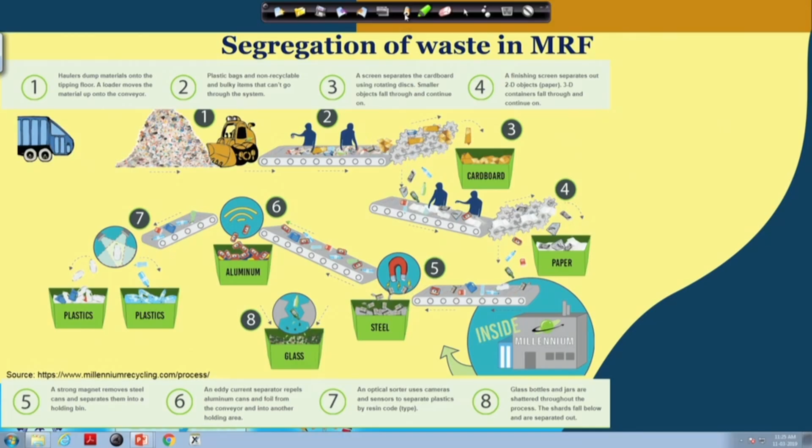So when we talk about plastic waste, for the most part the plastic that we have to deal with is coming from the municipal solid waste. It's the municipal solid waste material recycling facility, which is also sometimes called MRF, which stands for material recycling facility. So there waste comes in and it gets separated into different fractions. So there are different steps here.

The haulers will dump the material onto the tipping floor. Then plastic bags and other non-recyclable bulky items can't go through that system. So the screen will separate the different material. Then the screen will take the cardboard using rotating discs. Smaller objects will pass through. So cardboard will get collected and taken away.

Then you have a finishing screen that separates out 2D paper from 3D containers. So you have a screen here which removes the paper. Then you also have another step which removes the metal, so you may use a magnet to remove the ferrous, and eddy current separators to remove the aluminum. Now after doing all that, what you are left with is essentially different types of plastic.

There are different technologies out there for managing these plastics. There are sensors, and you can have density separation which will separate heavy plastic versus light plastic. You can also have color separation, where based on the color of the plastic it will try to separate it out. The more separation you can do, the better the quality of the material, and you can sell that material at a better price. So as I said, the strong magnet will remove steel, eddy current will remove aluminum cans.

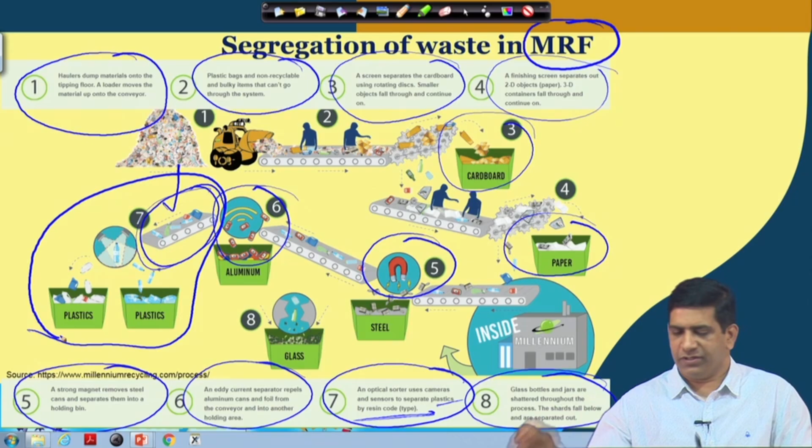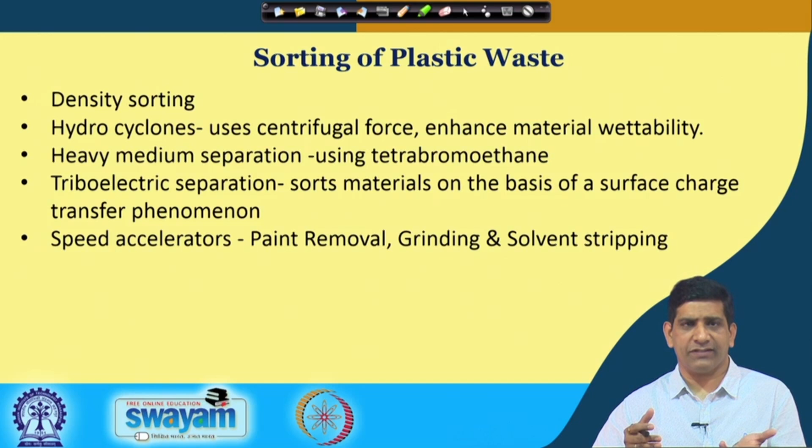So, sorting of plastic waste, you can do density sorting as we just talked about. You can have hydrocyclones where you use centrifugal force and enhance material wettability. Heavy medium separation, you can use tetrabromoethane to do the separation. Triboelectric separation sorts material based on a surface charge transfer phenomenon. You can have speed accelerators, paint removal, grinding and solvent stripping. You can also use the optical sensors we just talked about. So, other than the optical sensors, these are the other methods used for sorting plastic.

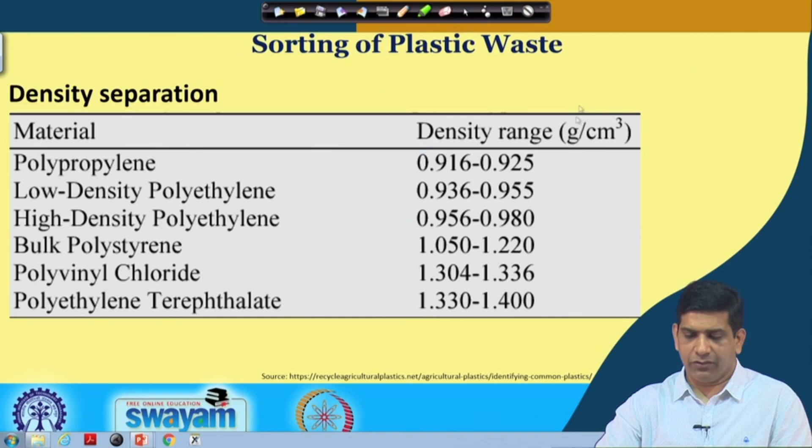So you will have issues getting these different types of plastic separated, but it does help in terms of at least doing the first round of separation, where you can have polypropylene separated out, with maybe a little bit of LDPE showing there. Then you have HDPE and bulk polystyrene, polyvinyl chloride, and polyethylene terephthalate. You may see some overlap as well, but at least it helps you sort it into 3-4 different fractions, and then you can go further and do other sorts of sorting to make it purer material.

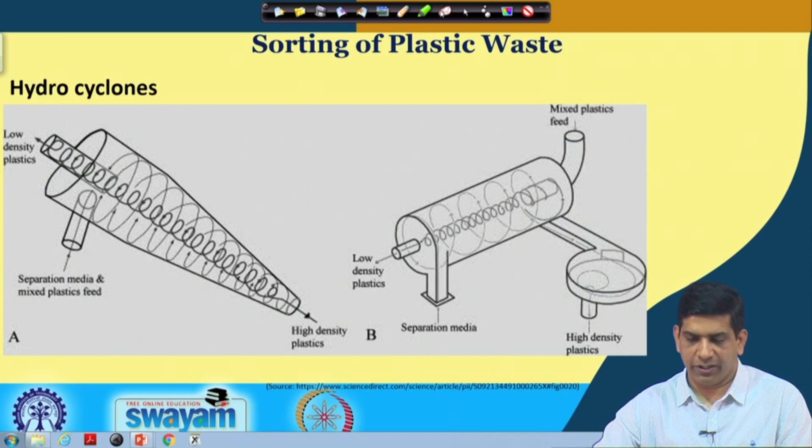Hydrocyclone: you use the hydrocyclone with a separation media and mixed plastic feed. You feed the stuff from here, this is the feeding area. You have a hydrocyclone where low density plastic comes out on this side and high density plastic comes out at the bottom. So mixed plastic feed enters from the top, low density material comes out from this side, and high density comes out from the other side. This is how you use hydrocyclones to separate low density from high density plastic waste.

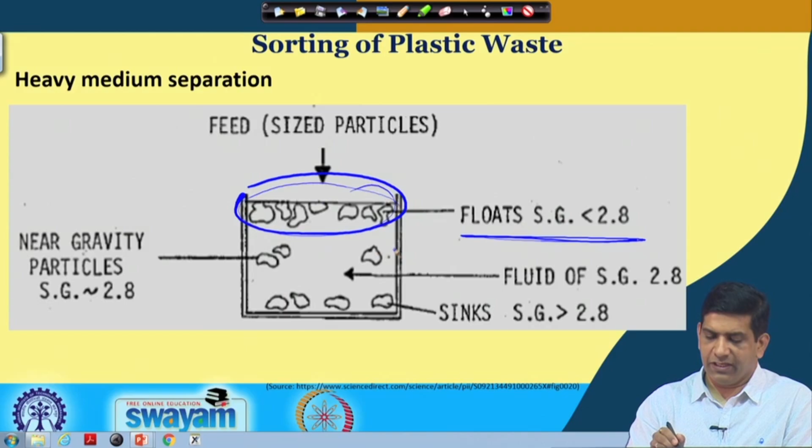Gravity separation as well, like heavy medium separation: you have different sized feed particles, you put them in, and some particles will float on top. So you'll have things floating on top, and in the medium fluid anything less than specific gravity of 2.8 you find on the surface, anything around 2.8 you find in the middle, and anything greater than 2.8 shows up at the bottom.

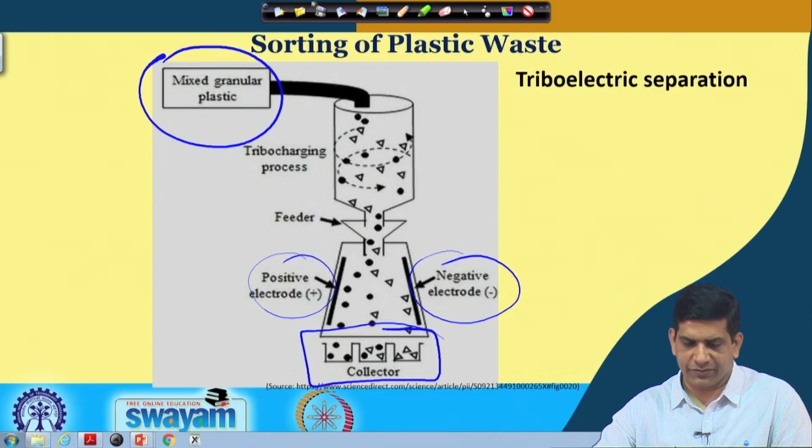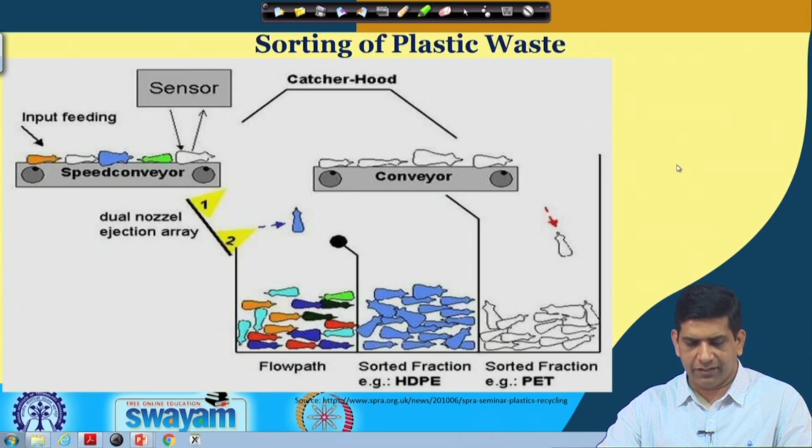So now we will have a quick look at the different processes I just talked about. We will watch a video which explains this process in a bit more detail. Let's have a look, and I'll try to walk you through the video as it shows the different processes.

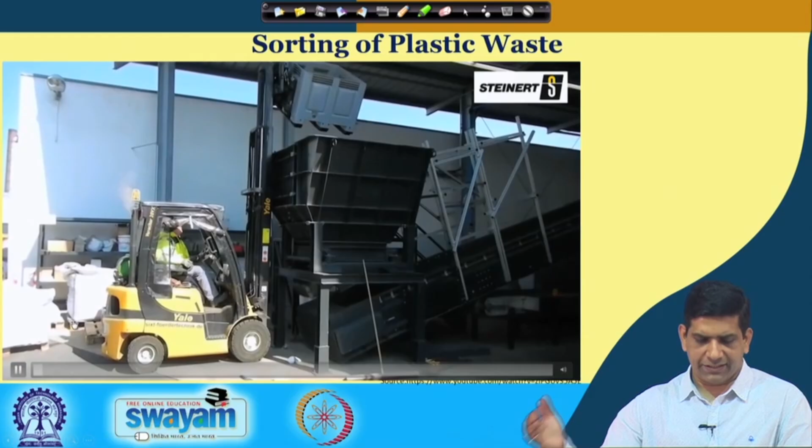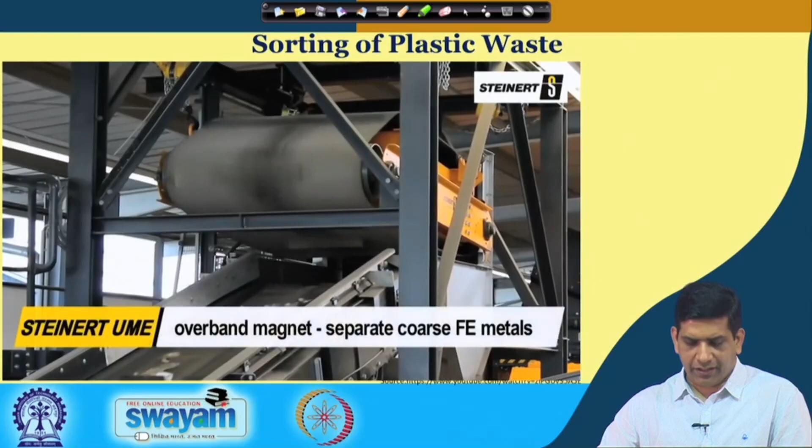So here, as you can see, the mixed plastic is getting loaded. This is your mixed plastic container, and then it goes into a conveyor belt. Here the overband magnet will separate any iron material. As you can see, the magnet is taking those iron materials. So anything with iron, even iron attached to plastic or plastic attached to iron, it is getting removed.

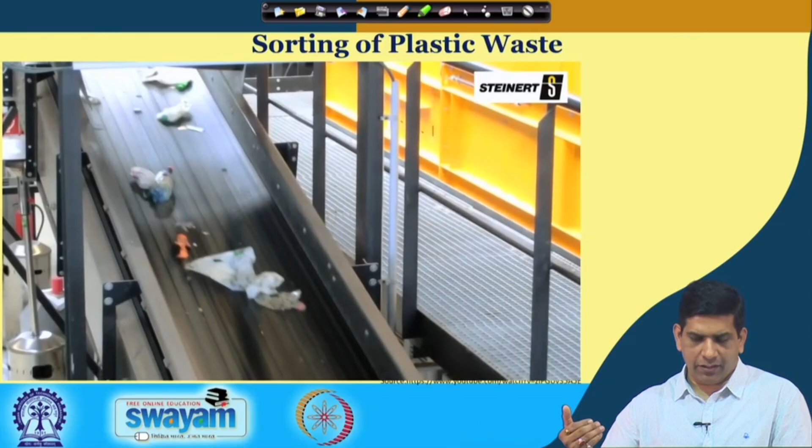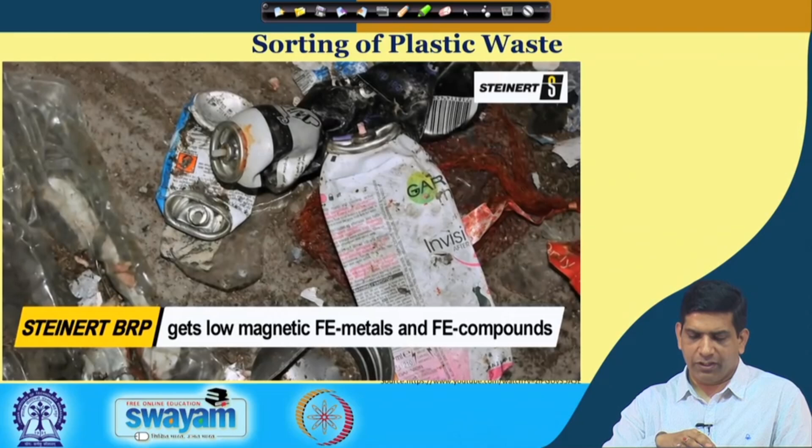Then it goes further, and here, all these plants you see lots of conveyor belts. So you have a magnetic head pulley with rare earth magnets being used. It gets low magnetic iron material and iron compounds, so even that is removed out. So you see those traces removed.

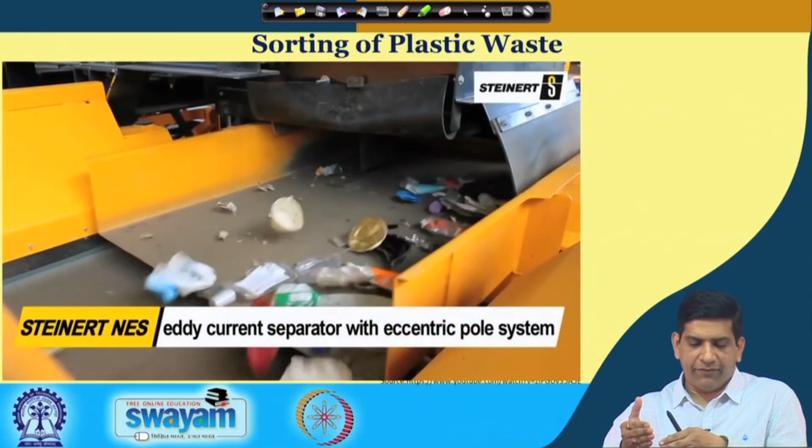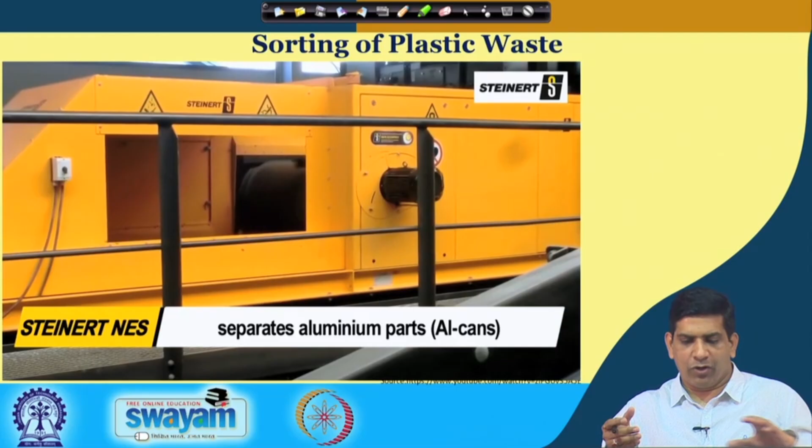Many times this packaging material has mixture stuff, so that needs to be removed, that becomes contaminant. Now after that you have the Eddy current separator. What it does is it removes aluminum cans. As you can see, things get blown away, separating aluminum parts. So anything with aluminum gets blown away in this Eddy current separator.

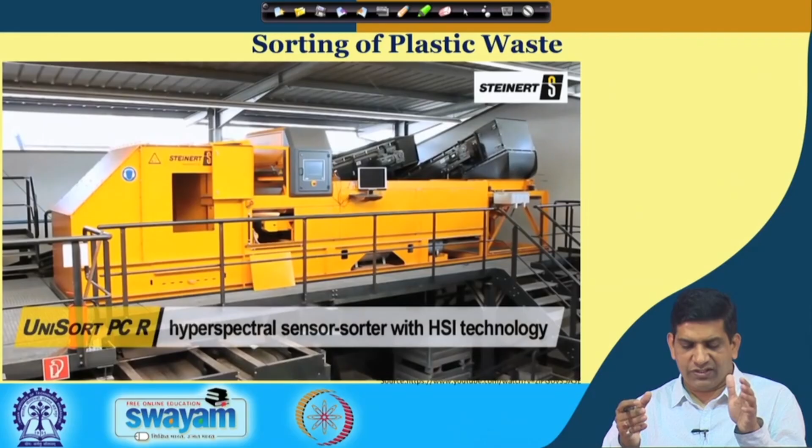So aluminum is taken out, so that can go as aluminum waste. So the rest, now after removing iron and removing aluminum, in terms of the container system, you see mostly now it is your plastic. So it is a hyperspectral sensor sorter.

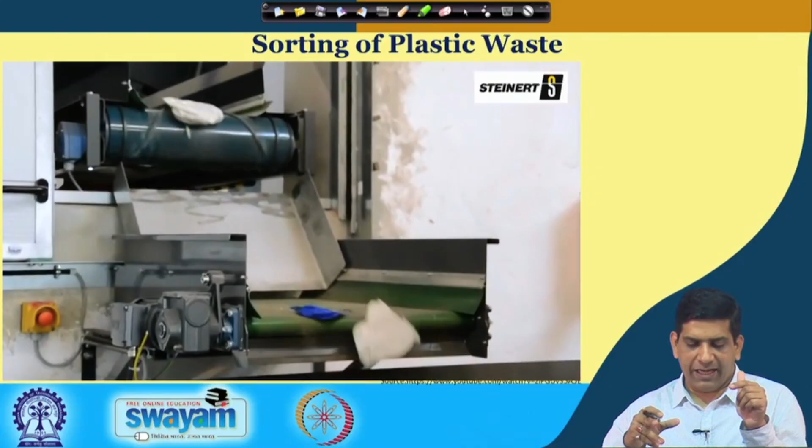This sensor sorter's first task is to take out the clear PET fraction. Anything clear PET bottle, it is removing that, and then again it is on the conveyor belt. These plants have lots and lots of conveyor belts, things just moving around.

Then you have another sensor sorter. After removal of the PET, it will go for HDPE. Yes, so it will try to take the natural polyethylene and HDPE fraction, and they are being taken away. So you get the HDPE and natural polyethylene coming out here. This is how things are getting sorted out.

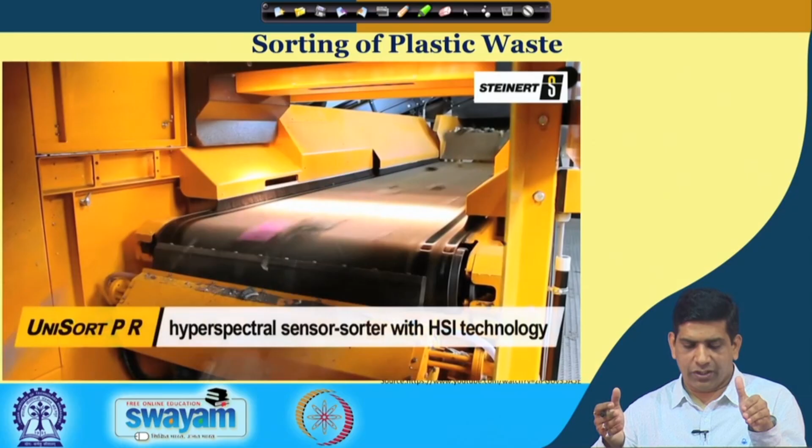Then again it goes another round, which you will see here, where it tries to separate the PP fraction, which is the polypropylene fraction. So that is coming out as well, a different fraction. We got PET first out, we got HDPE out, now we are getting PP out. So it helps us separate the different fractions of plastic.

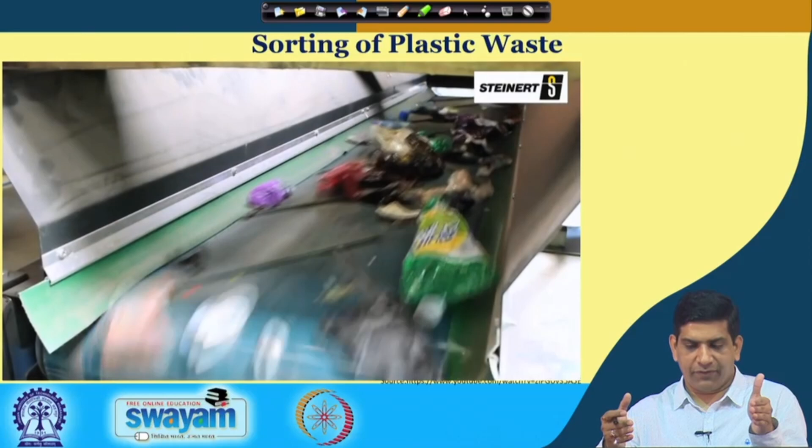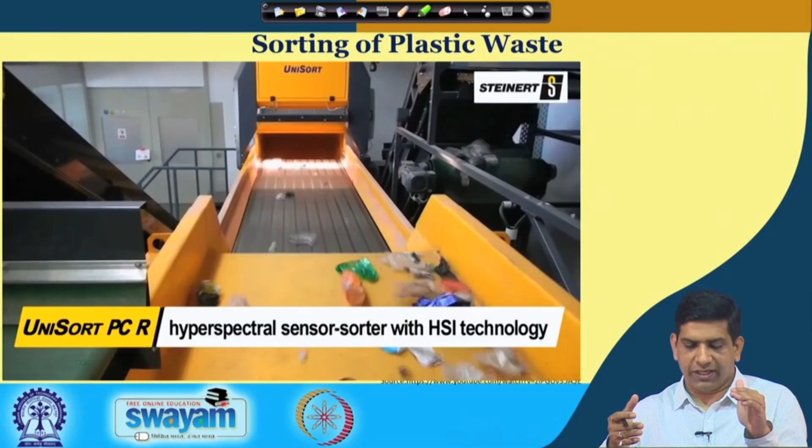Now whatever remains again goes back on the conveyor. As you can see, we have lots of conveyor belts in any material recycling facility. So again it goes through that, where it tries to take out mixed color PET. Earlier it was clear PET, now it is mixed color PET. That is all showing up, getting into this particular material. The rest is probably film plastics and other low quality plastic material, now coming out on those conveyor belts.

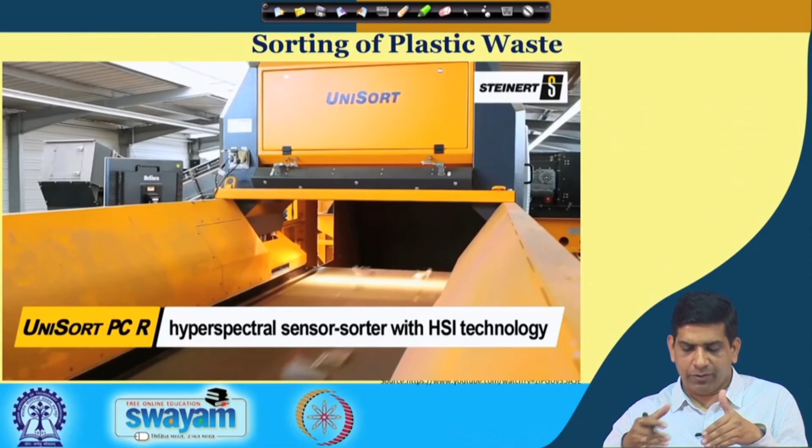And here, in this particular sensor sorter, it is trying to take out colored PE and colored HDPE. So you see colored PE and colored HDPE coming out. We get all the different fractions, and there will be some contamination, some other fraction, some errors will be there, but these technologies are getting perfected to have minimum error.

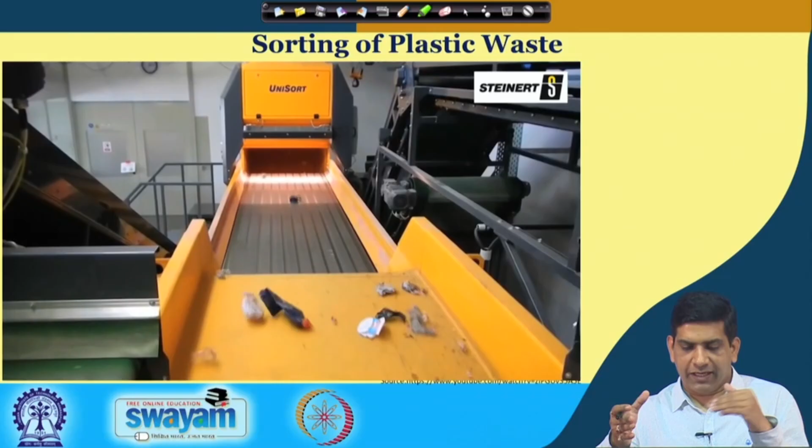So next sorting, as you can see, it is again going through that sorting process. Here it is taking the recovered plastic fraction. So whatever remaining plastic there is, it is just coming out there.

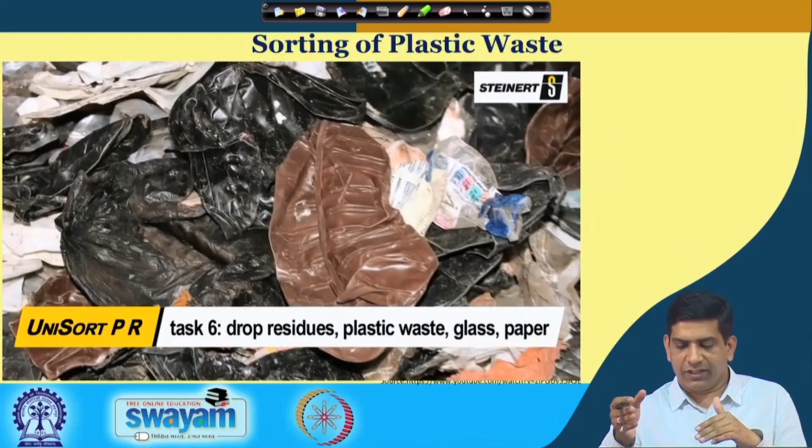So this is how the sorting is done, and what you saw in this particular video is mostly just that container stream. It is not removing glass or paper. So whatever is the residue now at the end, you see that dropped residue - some plastic waste which was other types of plastic, some glass, paper. They are not recycled in this particular system, but there can be a system in place where you do that as well. So this is how the mixed plastic is sorted out.

And these kinds of plants exist in many European countries, in the US, and some other countries like Australia and other places as well. And so we need to note, as you saw, it's energy intensive.

It's mostly automatic, not much manual work involved. Everything was through the machines. Those machines are costly, they are not cheap.

But if you look at the long term cost, as we were talking about in the previous video, towards the end, like $8 billion. So if you look at the overall long term cost, it will come out to be much cheaper when we look at the life cycle cost of not managing the plastic waste properly.

Once you separate these different types of plastic, each one of those components becomes valuable. They can be recycled, they can be sold at a much better price rather than when you are trying to sell mixed plastic. Now many countries in the world are not taking that dirty plastic as well.

In India too, very recently there was a regulation that all plastic solid waste import will be banned. The details are still coming out - this just happened in the month of early March, late February of 2019. So details will come out, and we'll know more about what exactly it means. I think it is being done as a preventive measure because of the China ban that we talked about.

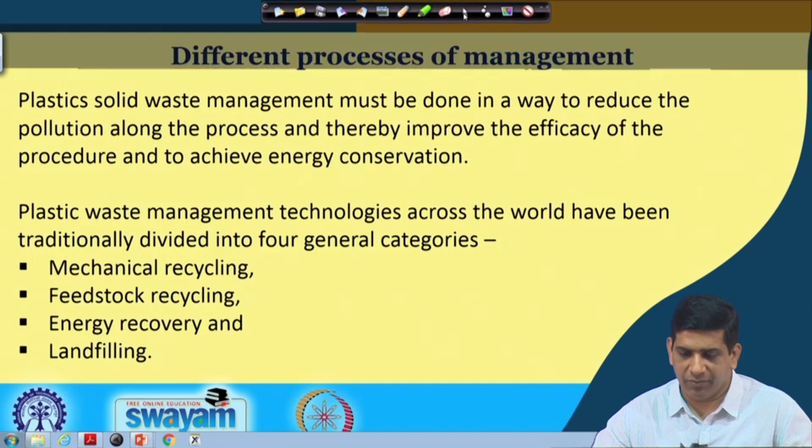So when we talk about mechanical recycling, we are talking about pelletizing, extrusion, injection molding, drawing and shredding. That's what we are talking about in the mechanical recycling part.

Then feedstock recycling, you can go for pyrolysis, gasification, waste to fuel - that's your feedstock recycling. Energy recovery, you can go incineration, co-incineration.

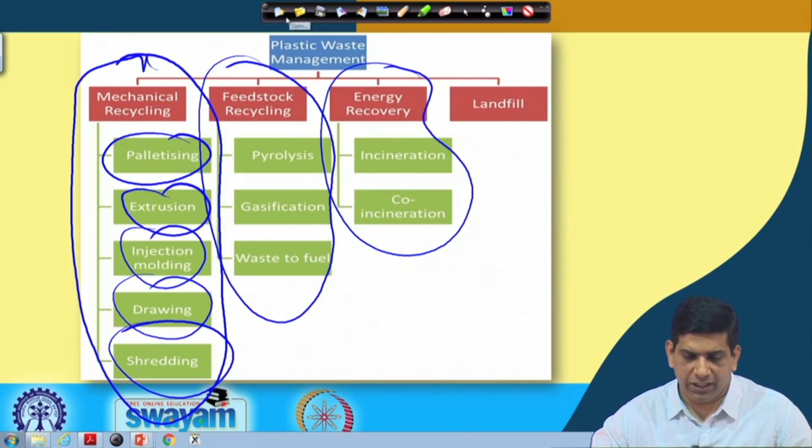Then finally landfill, which is just dumping the waste in a landfill and managing the impact from there. So broadly, these are the four major ways in which plastic waste is managed or can be managed, and many times it is managed as part of the municipal solid waste.

So, in terms of recycling, what we are trying to do is recover or reclaim the discarded waste, reprocess it, refine it to yield alternative new products. So, that is what recycling is all about, trying to make new products, maybe similar products, but new products from the discarded waste. So, that whole process is recycling, and it also depends on the resin code.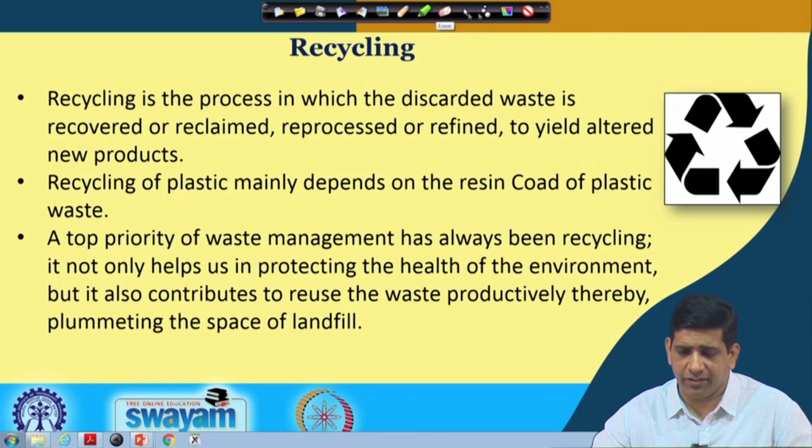So, the top priority of waste management has always been recycling. Not only does it help us in protecting the health of the environment, but it also contributes to reusing the waste. So, therefore, it helps in keeping the landfill space low. We do not want to put waste in landfill, we should try to recycle it.

Mechanical recycling is a process of conversion of waste or scrap into a product with similar properties to the original product. So, you try to make similar properties of the original product. What you do is you recover the product from plastic scrap and maintain the original molecular structure of the material. So, you do not mess up the original molecular structure of the material.

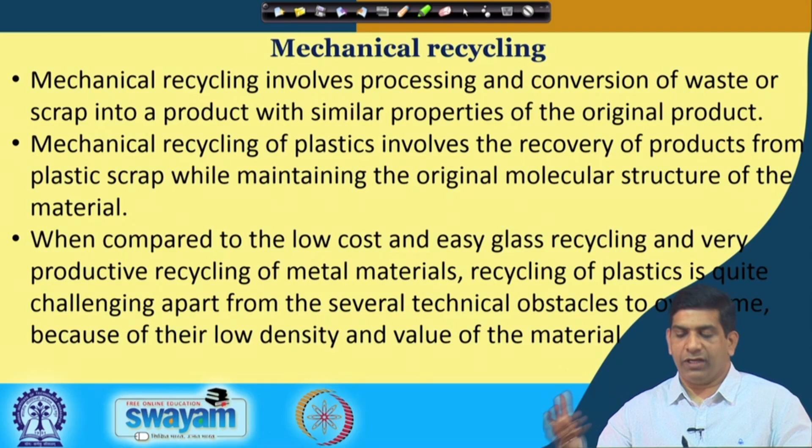Compared to the low cost and easy glass recycling and very productive recycling of metal materials, recycling of plastic is quite challenging, because apart from several technical obstacles to overcome, they have low density and low material value. So, for plastic recycling, other than PET and HDPE to some extent, for other types of plastic, because of the low cost, you do not get much value out of those recyclable plastics, and then it becomes challenging from an economics point of view. So, it is quite challenging and there are some technical obstacles which we talk about.

So, if you look at mechanical recycling, you can inspect different types of plastic, and then you try to separate it out. Those plastics will have some dirt associated with them, things which need to be washed out. So, you do the washing as well as chopping. After washing and chopping, since you washed it, it will get wet. So, you use a drying method.

So, you dry it, then melt it by heat and pressure. After melting it, you can filter to remove the contaminants. After it is all melted, things can be filtered out to remove the contaminants, and then the molten plastic can be extruded into fine strands, and after that you can pelletize it, and these pellets can be used to make new products. So, that is how mechanical recycling is typically done.

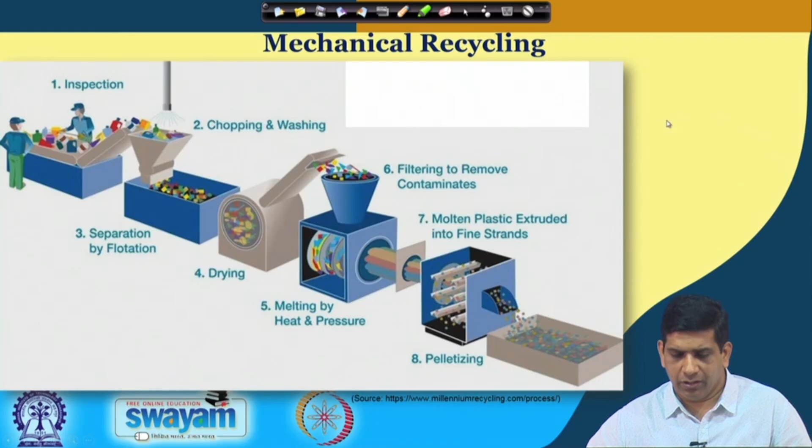After drying, you melt it by heat and pressure. After melting, you use the filter to remove contaminants, and then you extrude the molten plastic into fine strands, and then you finally pelletize, and that pelletized plastic can be used for production of similar types of material to the original product. So, here is another picture explaining similar stuff, not much of a difference. Again, you have the collection of plastic, just an illustration in a different way.

You have waste plastic being collected, what you saw in that video. So, it is kind of after that. Then you sort, which was done in that video, sorting of the plastic. Then you make granules out of that, wash the granules, likely to go through the wash plant, and you remove labels, residual content and soil. After wash, again you dry, as we just talked about.

After drying, the granules are fed into an extruder. So, you get the extrusion done through a die in the form of a continuous string. Then you can water cool it. The strings are water cooled and chopped into pellets by a revolving cutter. So, you make it a pellet. The pellets are bagged and ready to be sold to a converter who uses the recycled material to produce new plastic products. So, this is how the whole thing works.

So, this is in terms of the mechanical recycling. So, this is kind of what you saw in the previous slide, and plus this part is what is done in that video that we saw earlier, and then you have the rest of the process. So, this is how the recycling of plastic is done in terms of what we know as mechanical recycling. Try to get the plastic, make the granules, and make a new product out of that.

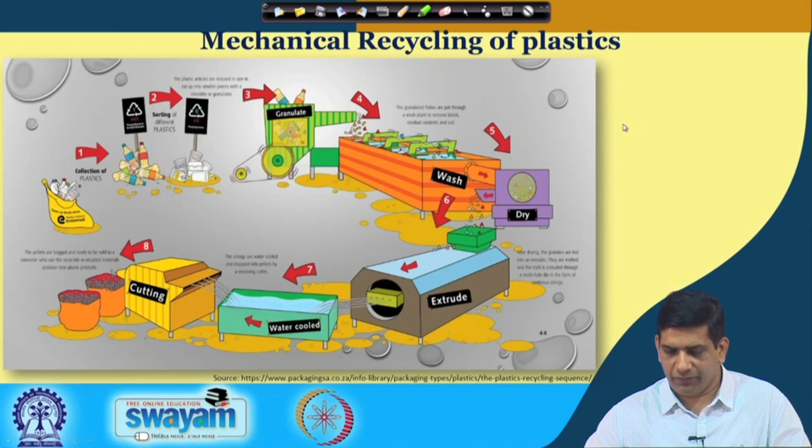So, if you look a little bit from a city level, how the whole system will look like. You will have consumers which will have different types of plastic bottles, plastic containers being used. They will give it to the municipality. The municipality will collect the recyclables, do the sorted collection, and the sorted waste is compressed in a bale. From the bale, it goes to where you have the different types of plastic coming in. You shred it, you clean it, you make the flakes.

So, if these are PET flakes and pellets, then those flakes and pellets can go to textile, to sheet material, to injection molding, to bottles. So, it can be used in working clothes and uniforms, can go to shirts after production of yarn and sewing, and it can go into sheets, which by vacuum molding go into fruit trays; injection molding can be used for stationery; and then bottles, like detergent bottles for the kitchen or different types of bottles. So, this is how the whole PET bottle recycling to a new product is done. It can be done.

So, as you can see, the technologies again are out there. For each one of those, when you go on Google or YouTube, you will find several examples, several videos which explain it in more detail. So, essentially what is happening here is you are taking the plastic at the municipal level, it is sorted as per MSW management rules. Then plastic is separated into different types. It gets baled, goes to plastic recyclers where it's shredded, cleaned, and flake is made.

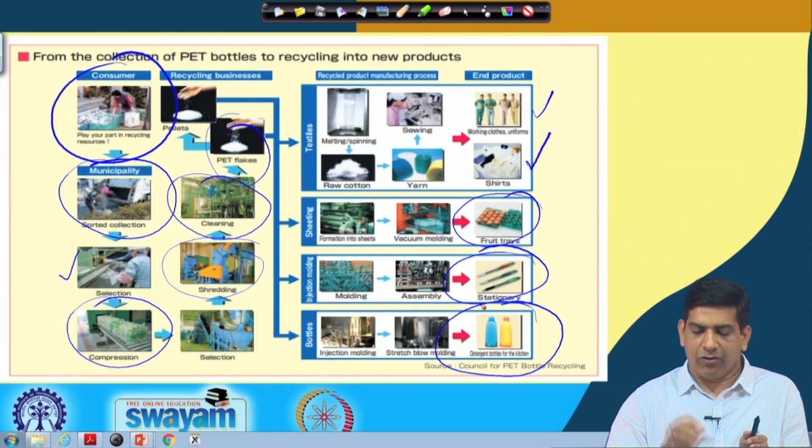The flake goes for either application in textile, we are talking about PET, or making sheets, or injection molding, or making bottles, and the newer product is again coming back. And once it gets discarded, it will go back here, and that cycle will continue again. So, this is how it can be recycled quite a few times, and once you cannot recycle it, of course, it has to be managed in a different way, which we will talk about in later videos.

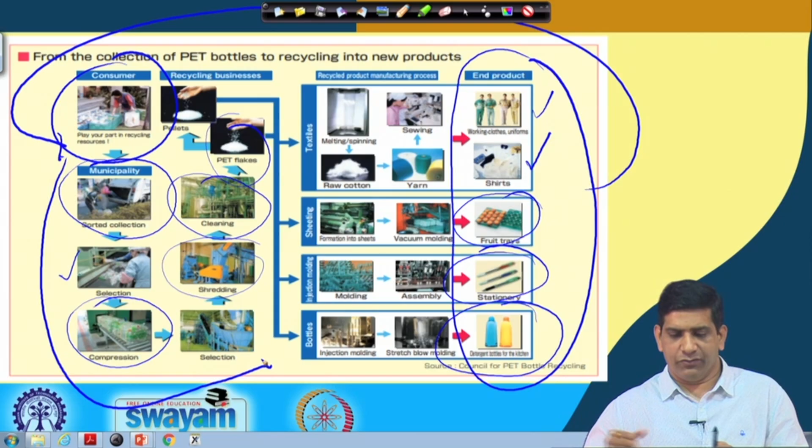So, with this I think we can stop here for this particular video, and we'll continue our discussion in terms of mechanical recycling and some of the advantages and disadvantages and other stuff in the next video. So, we can potentially start from here in the next video.